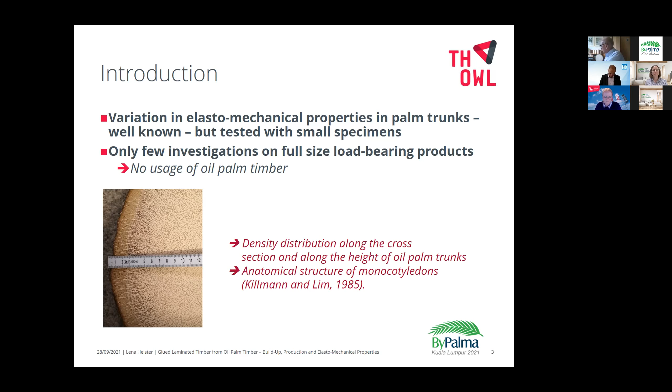Characteristic material properties are required for further industrial processing of oil palm timber into large-scale load-bearing products such as CLT or GLT. Due to the density variation within the trunk and the correlation between the elastomechanical properties and density of small test specimens, the density is the reason why grading is required.

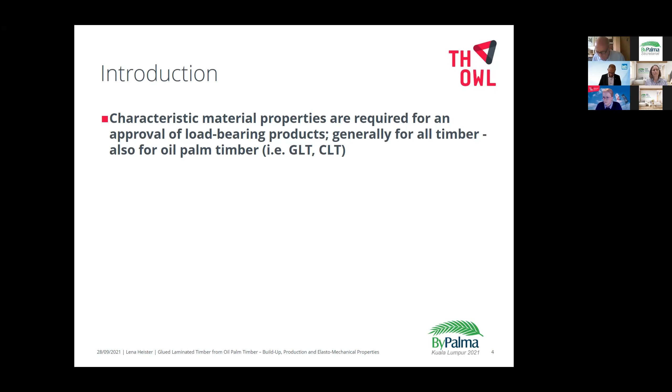Now we come to the aim of this investigation. The basic idea of grading according to the density is to cut the log into strips so that strips with a homogeneous density along the cross-section are obtained. The width of the strips is individual and depends on the density profile of the board cross-section.

Strips of comparable densities are edge glued together to achieve a raw material for the production of GLT. Only by this procedure can homogeneous bending values and an optimization of properties, compared to the conventional way GLT lamellas are produced when made of oil palm timber, be reached.

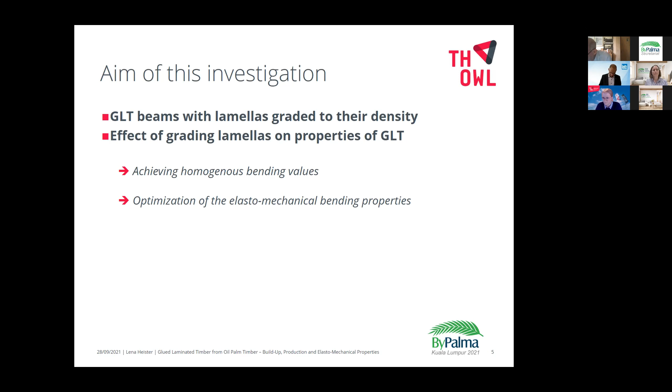As my colleague Katja will give later more information in a presentation about grading of oil palm timber, I would like to give you now a short overview.

There are no grading standards for oil palm timber. Softwood is classified into strength classes called C classes, and based on the strengths, mechanical or visual techniques can be used to determine strength by measuring the density of knots, for example.

Due to the correlation between bending strength and density of small test specimens of oil palm wood, the calculation of grading limits for oil palm timber was made according to the standard for softwood. Therefore, a statistical correlation model was used to calculate the forecast limits.

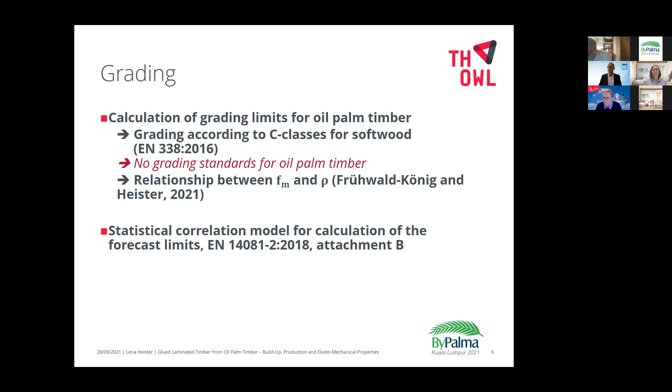In this picture, you can see on the left side the density profile along the width of an oil palm board from the outer zone measured with X-ray. The density of the board varies across the width from nearly 800 kilograms per cubic meter on the left to approximately 350 in the middle and up to 450 kilograms per cubic meter on the right side.

When cutting full-size lamellas for the production of GLT conventionally, there will be lamellas with an inhomogeneous density distribution along the cross-section. The cutting of lamellas is done alternating from the edges due to the tapering of the trunk. In comparison, on the right you can see the same density profile and the procedure of cutting strips as a function of the density gradient across the board cross-section.

The calculated density limits to achieve a certain strength are shown here as gray horizontal lines. The cutting limits are located at the intersection between the smooth density profile and the density limit value. In contrast to the conventional method, strips with individual width and homogeneous density distribution across the cross-section are obtained.

For further processing of GLT lamellas, strips with comparable densities are edge-glued together to edge-glued timber. The lamellas are then cut off the edge-glued timber as in the conventional method.

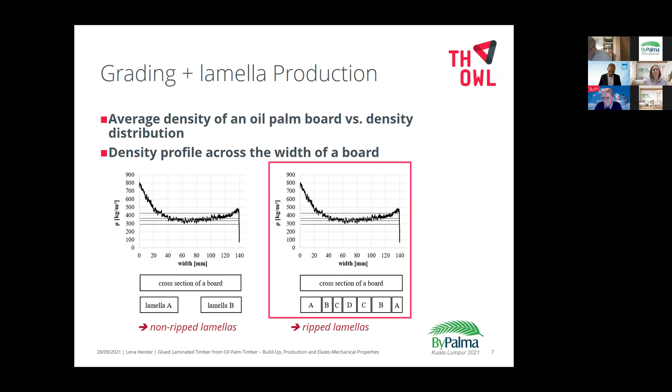For the production of the GLT beams, 30-year-old oil palm trunks from Malaysia were used. For the ripped lamella and non-ripped lamella-based beams, the same amount of boards was used. The arrangement of the lamellas in the beam design was selected in accordance with the moment effect in the beam during a bending load, meaning lamellas with the lowest density were arranged in the middle.

The lamellas with the highest density were arranged in the lower lamellas, and those with the second highest density in the upper lamellas, as you can see in the picture.

The density limit values result from the calculation of the grading to reach strength classes C10 and C14 calculated for oil palm timber. GLT beams of both strength classes and lamella structures were produced.

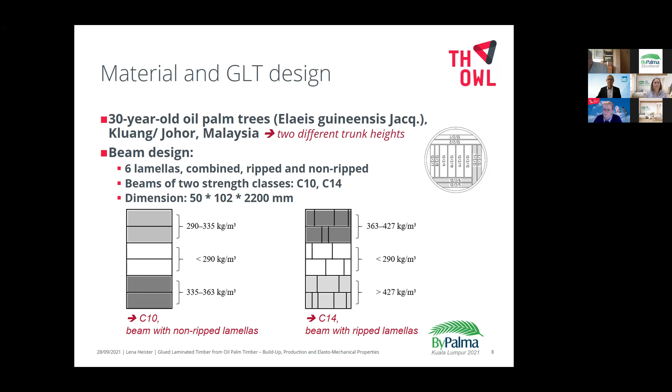Now you can see some pictures of the production. On the left side, this shows the cutting of the strips according to the density profile, and the middle piece is left over due to the tapering of the trunk.

The picture in the middle and on the right shows the process of edge gluing density-comparable strips with individual widths together.

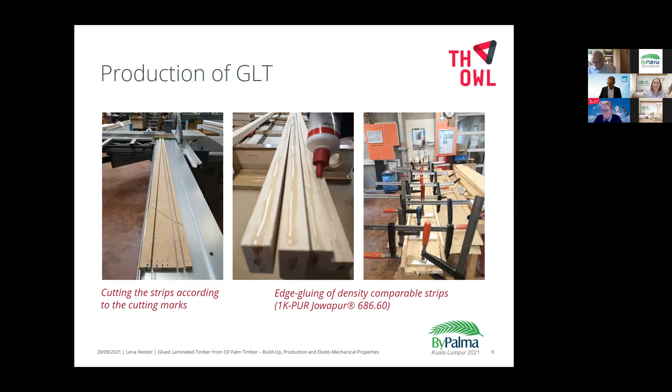For pressing the beams, a timber press by Minda Industrieanlagen in Minden was used. The dimensions of the press are 3.40 meters in length and 1.20 meters in width. The press has two pressing plates, which can be controlled separately by a hydraulic pressure system. These types of presses are commonly used for the production of GLT or CLT.

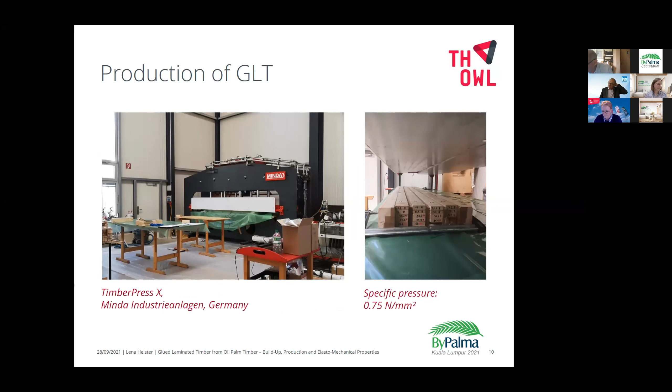The beams were tested in a standard 4-point bending test. Besides the determination of strength, the local and global stiffness values were determined. The beams of strength class C10 were tested with a 20 kN testing machine, while for the beams of strength class C14, a 100 kN testing machine was used.

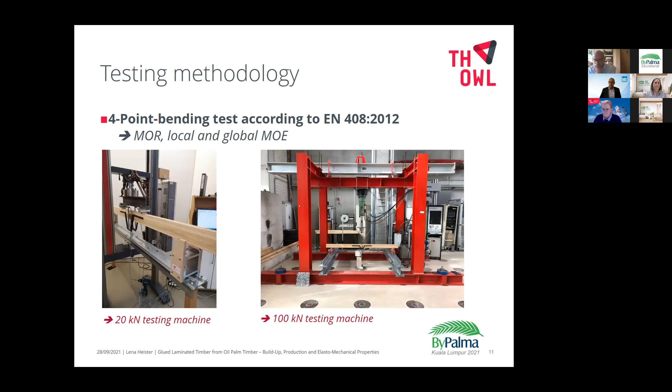Now we come to the results of this investigation. The table shows the values for density, in addition to the characteristic density values. The characteristic values were calculated in accordance with the standard, after calculation of the reduction factor k(s).

In addition, because of the small number of specimens, the value of the 5% quantile for a standard normal distribution was used for the reduction factor to calculate the characteristic value. This way of calculation was used for all characteristic values.

The mean density of the ripped lamella-based beams is higher compared to the non-ripped lamella-based beams. All beams show a comparably high coefficient of variation.

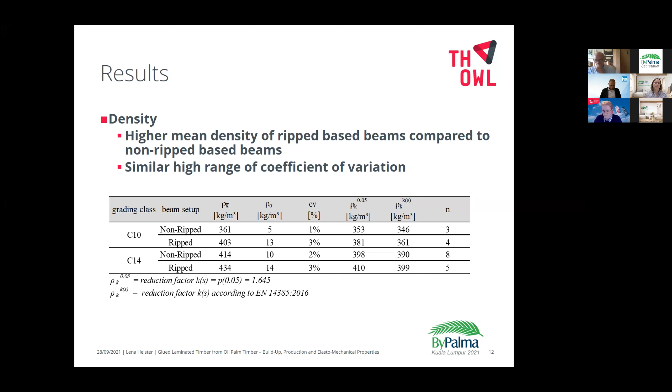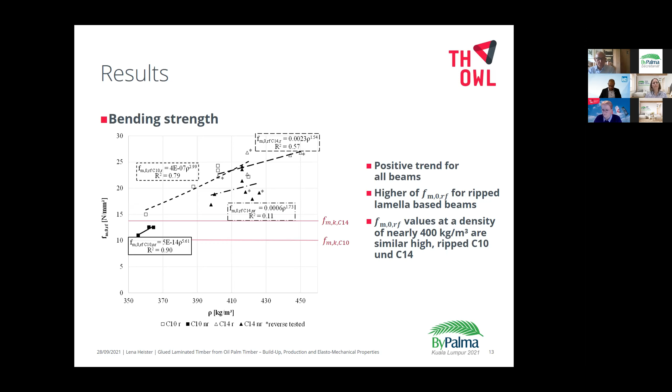This diagram shows the relationship between bending strength and mean density of GLT beams made of oil palm timber. For all beams, a positive trend between strength and density can be seen. The strength values of the ripped lamella-based beams are higher compared to the non-ripped lamella-based beams. The strength values of all beams, with the exception of the non-ripped lamella-based beams of strength class C10, are above the targeted characteristic strength values.

The values of the local MOE of all beams are shown in this single value chart. The values show a high scattering. Comparably high stiffness values of almost 4,000 and 5,000 newtons per square millimeter are achieved with different strength classes and beam setups.

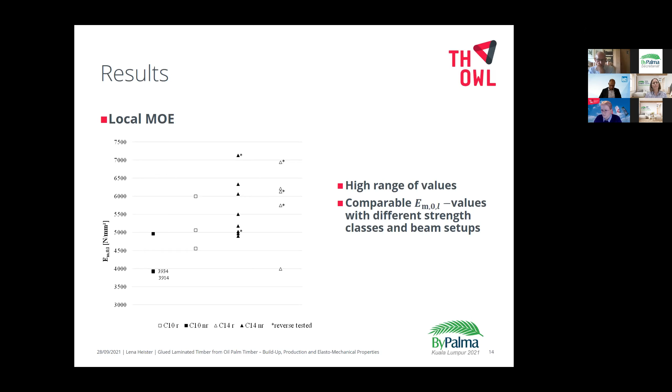This diagram shows a positive trend between bending strength and stiffness for all GLT beams. The correlation between strength and stiffness is higher for ripped lamella-based beams compared to non-ripped lamella-based beams. There's a high range of strength values at an MOE of 5,000 Newton per square millimeter.

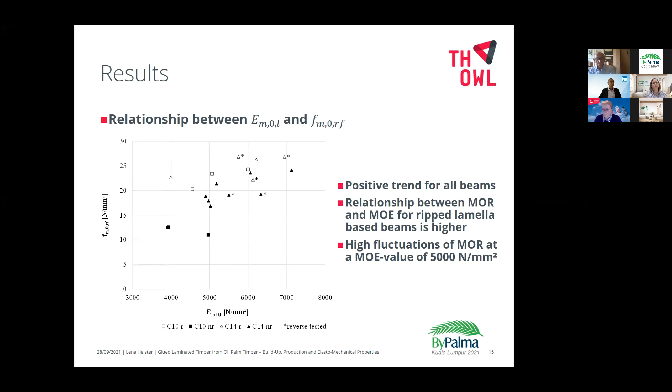Now we come to the comparison of the global and local stiffness values. The diagram shows the standardized linear relationship between local and global stiffness for softwood. In addition, the values for GLT made of oil palm timber are added. As you can see, the relationship for softwood does not apply for GLT beams made of oil palm timber.

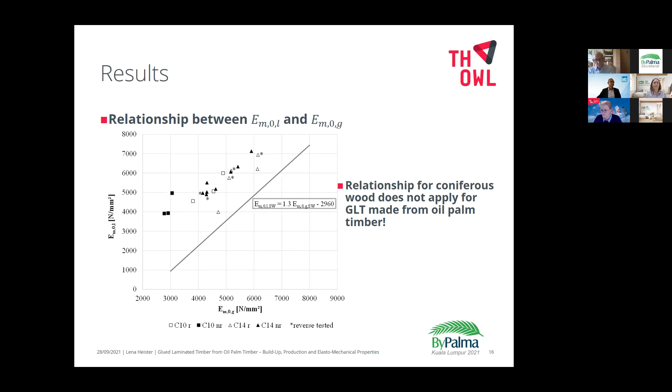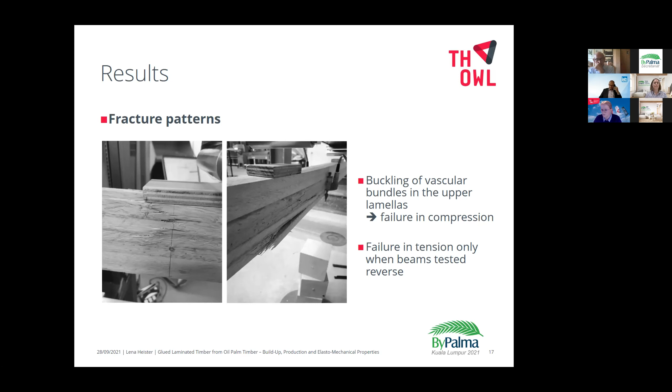The comparison of the characteristic values for strength classes C10 and C14 for GLT beams made of oil palm timber, grayed out in the table, to the standardized characteristic values for softwood are shown in the table. As the comparison shows, the characteristic strength values of strength class C14 for softwood are achieved, except for GLT beams made of non-whipped lamellas of C10. Furthermore, the characteristic strength values of the whip-based beams are higher than the targeted strength classes.

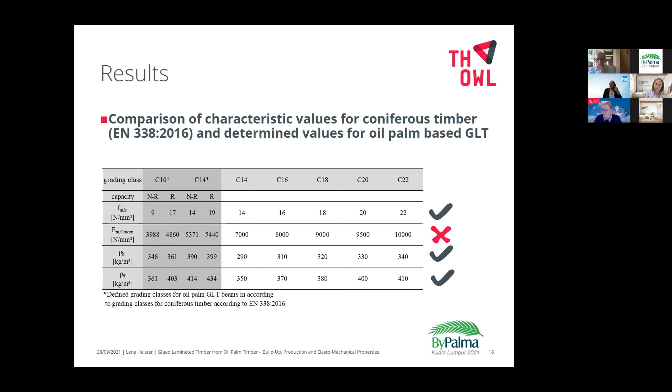The characteristic stiffness values for coniferous timber are not achieved with GLT beams made of oil palm timber. The values for average density and characteristic density for oil palm beams meet the requirements of the standard. Finally, it remains to mention that the ratio between MOR and MOE for oil palm is significantly lower compared to the ratio for softwood.

Now I come finally to the conclusion. By grading the boards according to the density distribution across the cross-section of the board, the bending properties can be optimized compared to the conventional method of lamella production. Furthermore, the beam design, the quality of the lamella, and the beam structure have an influence on the failure pattern. The procedure for calculating a particular strength class is generally correct.

Both classes are achieved with whipped lamella-based beams. The existing characteristic values for the classification of softwood do not apply for GLT made of oil palm timber.